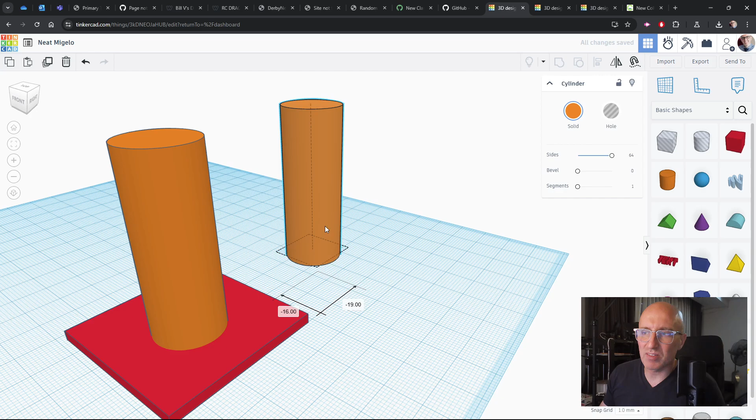You need to go and ungroup it, make a duplicate, keep this as the original, and make this into a hole. So then you can put a hole in here into your material, into your base or whatever it is you're building, the roof and other things. But this can only be for sort of 4 at the absolute outside, because again you're going to have supports on everything. And let's go and bring that through into my object here.

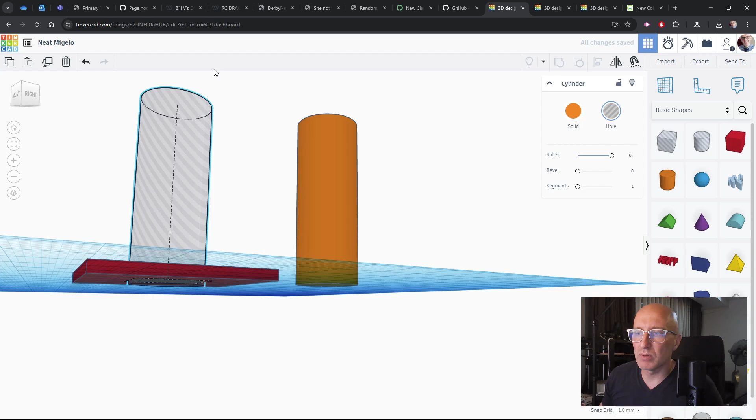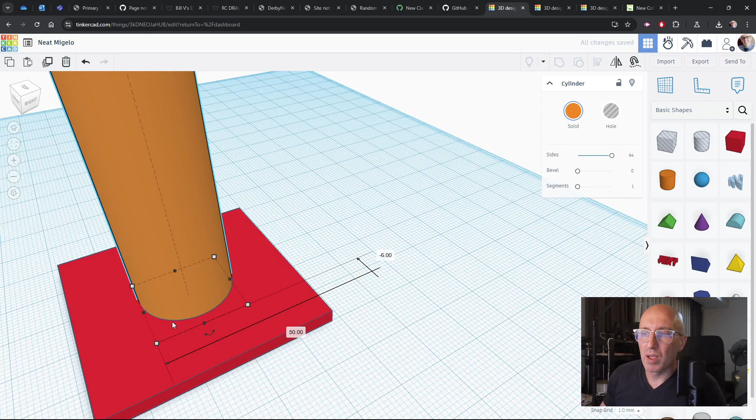I'm going to join those together. So I'm using the entire shape of the original object, making sure that this is completely aligned so that it's nice and centered. It takes 2 seconds to do that. Join them together. Now that piece there is ready to accept that there, because now you've got this piece here and the separate base, and they can be printed in 2 different pieces, which means that we can end up with something like this.

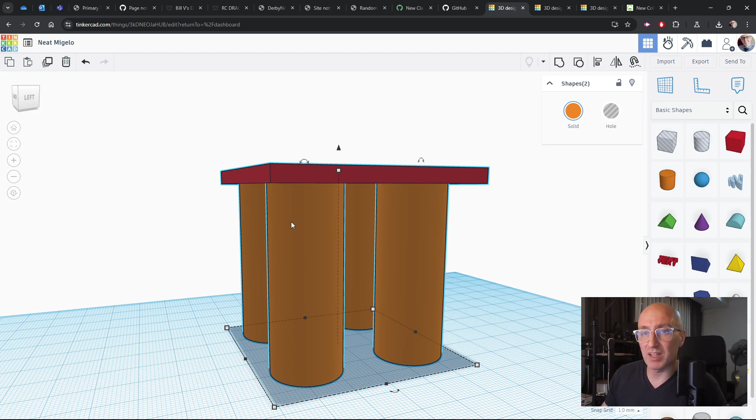Now we can have something like this, and of course normally if we try to print this and it had other pieces inside it, we would naturally have to print it upside down. More often than not, students have many objects inside here, and it makes it almost impossible to print with a good level of support and for it not to be ruined by the supports. So what we have to do is the same as before. I'll show you what it looks like in a second.

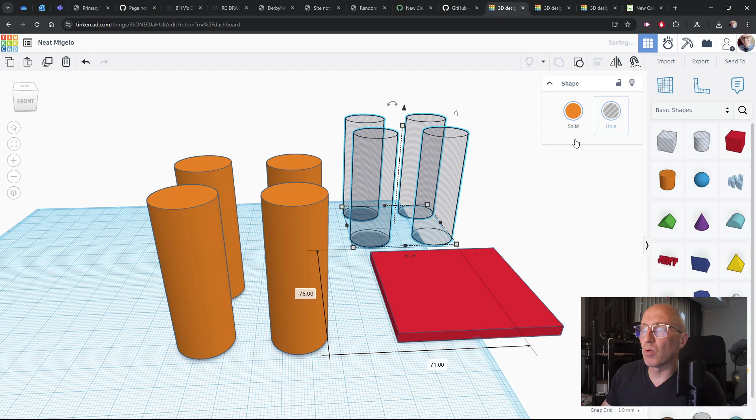We have to separate out the pieces, and then we have to go and duplicate these as the original pieces and turn them into holes, because we have to keep the original shape. So this is all solid now as an original shape, keeping all the sizes, dimensions, everything else like that. And I can go and very quickly just pull this into here, and I know that these are going to fit perfectly. I know they're going to fit together.

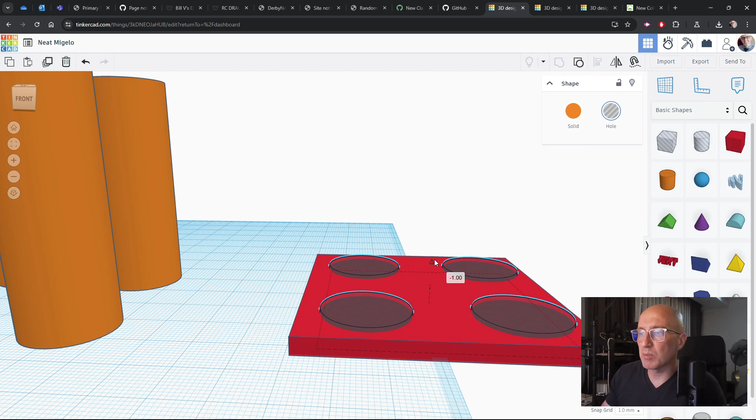So I'll just make that a little bit taller. I'm going to bring that together, just pop it into the shape itself, making sure I haven't gone all the way through the shape itself. Join them together. Now I have the holes, and I have 2 components that I can go and print nicely.

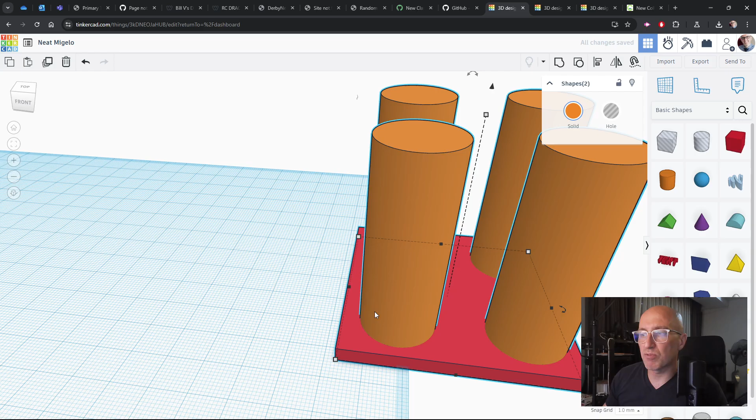And I know that anything that's attached to this I can print with it facing up, and then anything that's attached on this, the base, we can print it upside down in pieces, and then we can slot them together later on, because that will now print like this, and it will look like this, and it'll print like that. So we'll have the 2 separate pieces, the 3 separate pieces, or whatever's going to be attached in here.

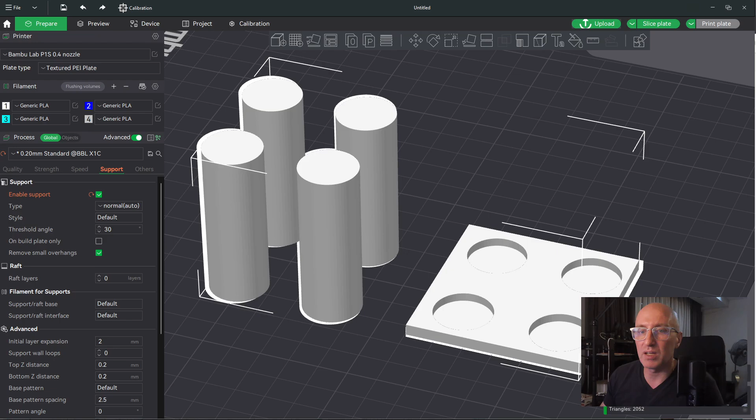It's going to slot into here, because we've used this piece here on the left hand side, and we've used it as the main shape to be the hollows and the holes for this over here. So that's what we've got to go and do.